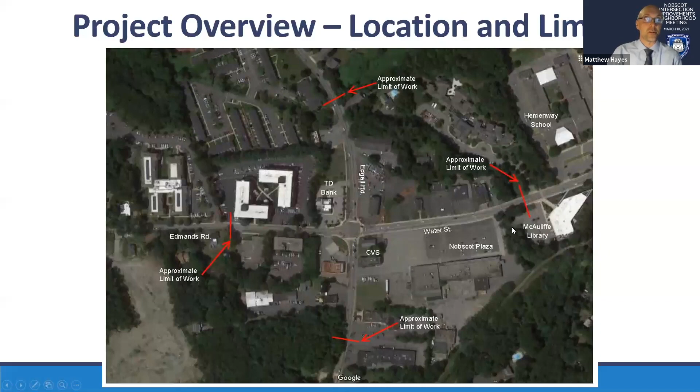You can see on the screen the limits of work for the project. We have Edgell Road running north-south, Edmands Road, and Water Street running east-west. The limit of work on Edmands Road is about 400 feet west of the intersection. South on Edgell, about 500 feet. North on Edgell Road, our limit of work is about 700 feet, and east on Water Street we're going about 800 feet, to approximately the entrance to the McAuliffe Library and past the fire station.

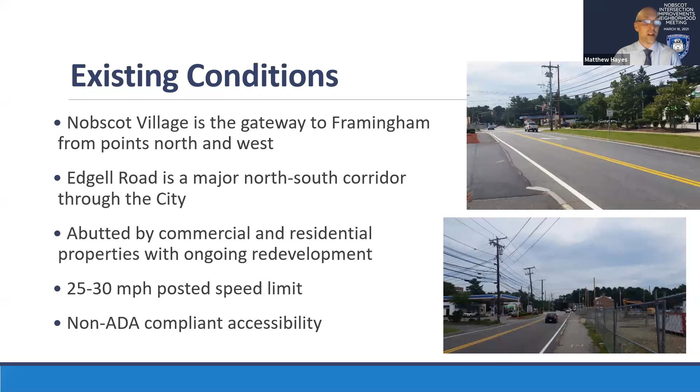Many of you are probably aware of the existing conditions at the intersection in Nobscot. The Nobscot Village is a gateway to Framingham from points north and west, with Edgell Road being a major north-south corridor through the city. The entire area is abutted by commercial and residential properties, with existing and ongoing development increasing the business and residential capacity of the area. The posted speed limits are 25 and 30 miles per hour, and many of the sidewalks and the intersection itself are currently not fully ADA compliant.

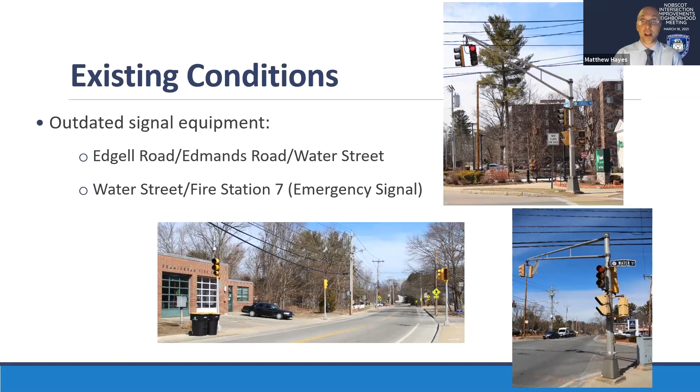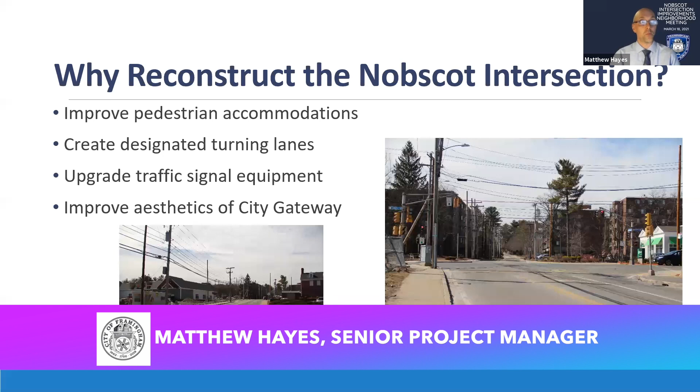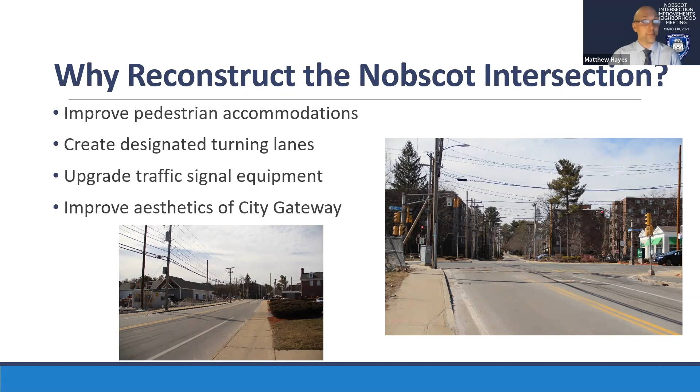The signal equipment at the intersection, as well as the emergency signal at the fire station, are outdated, and due to their location are prone to being impacted by traffic and turning vehicles, especially trucks. So why are we reconstructing now? We are looking to improve pedestrian accommodations, creating designated turning lanes or extending existing turning lanes, upgrading the traffic signal equipment and moving it to a better location away from possible damage, and improving the aesthetics of this city gateway.

Some project features include widening the travel lanes and turning lanes to 13-foot travel lanes and 10-foot turning lanes, with a turning lane on all four approaches to the intersection.

Pedestrian improvements include new cement concrete sidewalks throughout the project limits with a brick accent strip along the curbing, wheelchair ramps conforming to ADA standards, and new pedestrian signals and crosswalks. We'll also be installing ornamental traffic signals and street lighting.

The picture on the right is from the School Street and A Street intersection. You can see the ornamental mast arms, the street light posts, and the smaller traffic signal posts. They'll be fluted black, and they really add to the area, I think.

Also ongoing in the area are several commercial and residential developments, including the CVS right on the corner, which should be opening up probably sometime in April. The Village at Nobscot will be adjacent to the CVS. We don't have a schedule for when they'll break ground on that project, but we expect it no sooner than late summer. Also, the Gulf Station is scheduled to be redeveloped, and that project should get going early this year.

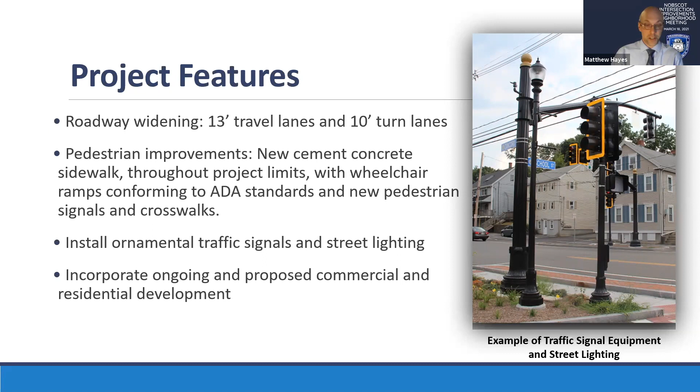Other project features will be accommodating bicyclists with sharrows, that's this pavement marking here. As you know, the corridor is very narrow and we could not fit in exclusive bike lanes, so this will give drivers awareness that they'll be sharing the road with bicycles when they're through here.

We'll be providing sufficient room for truck accommodations. As you know, some of the turns are exceedingly tight for passenger vehicles, let alone trucks, so those will be greatly improved.

The new MetroWest Regional Transportation Agency bus shelter will include a bench. There'll be a bus shelter placed in the vicinity of the McAuliffe Library on the east end of the project on Water Street.

We'll also be installing higher visibility crosswalks. These are the crosswalks you've seen around the city, the stamped imprint, the red and white, as you can see in the bottom right corner of this image.

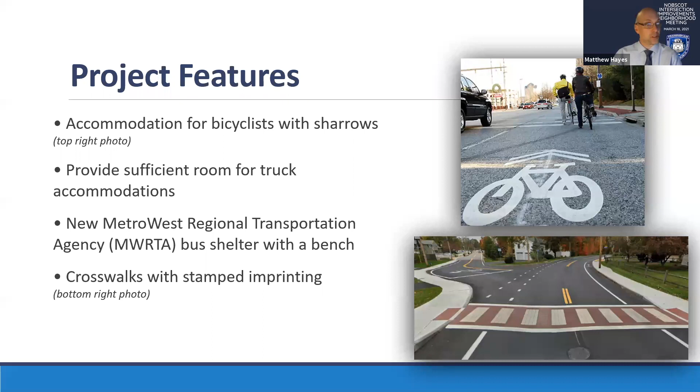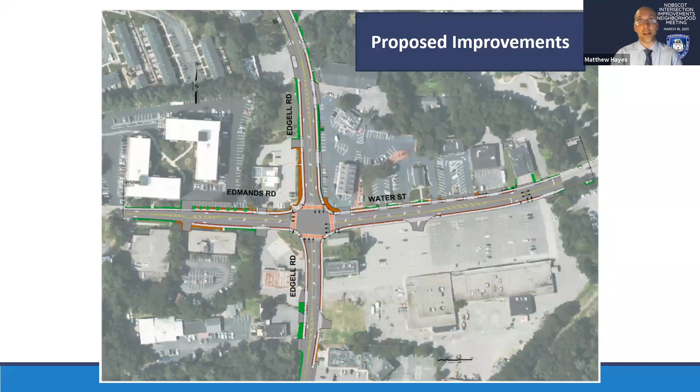Let me zoom into one area. Here we have Edmands Road. We'll be adding a left turn lane at this location, as well as a crosswalk where none exists currently across the Edmands Road approach.

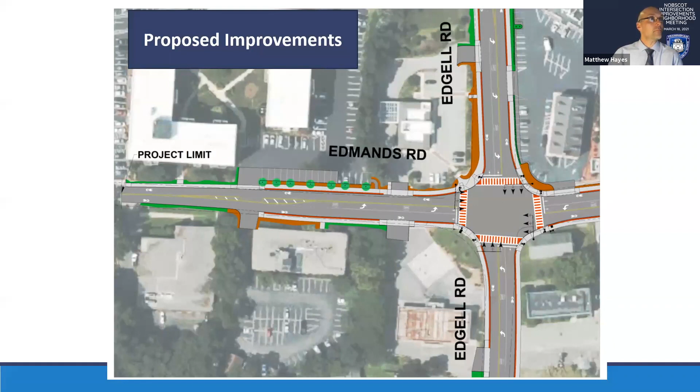Traffic and pedestrian impacts at this intersection. The construction duration is expected to take 2 years. It's a large project, and we expect to be complete with final paving early in the fall of 2022.

There'll be no work over the winter between. Construction this year will likely end in November. The construction moratorium will go until March, when we'll start up again in 2022.

The hours of construction for the project are Monday through Friday from 7 a.m. to 3:30 p.m. No night work is anticipated for the project, and no weekend work.

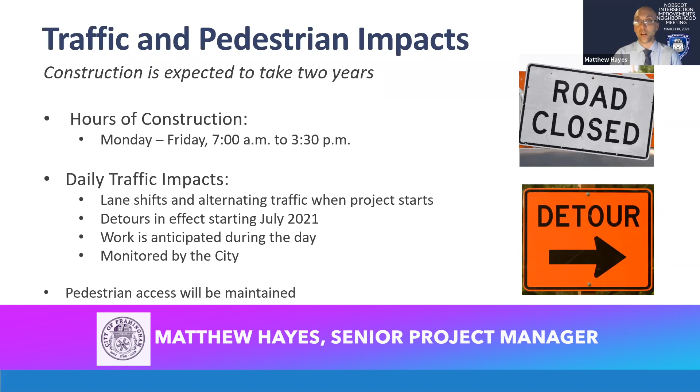Some of the daily traffic impacts that you'll begin to see starting next week will be lane shifts and alternating traffic, to facilitate some of the work along the curb line and drainage installations. There'll be police details on site to facilitate the traffic.

All the traffic in the area will be monitored by the city. We'll be monitoring traffic closely on a daily basis, especially when the detours are put into effect. We'll monitor those closely.

Pedestrian access will be maintained. There will be crossings where none may exist right now in order to facilitate pedestrians through the work zone. And police details, again, will be on site to facilitate traffic and pedestrian movements.

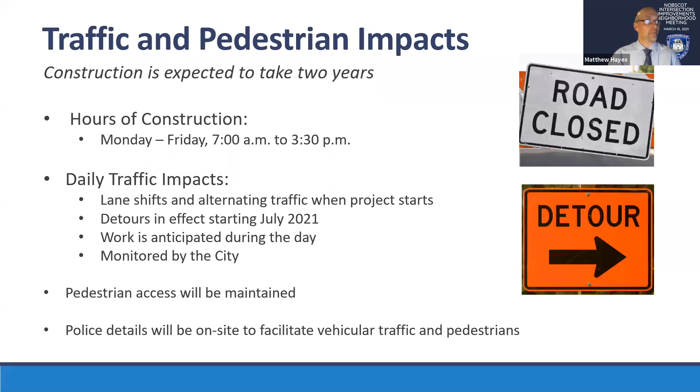Some additional ongoing projects in the area. There are 2 utility relocation projects. The main one that is required for this project is the relocation of the aerial telephone and communication lines.

All the utility poles have been installed, and Eversource Electric will be in the next month to begin moving all of their overhead wires. After that, communications telephone lines will be relocated as well.

Eversource Gas also has a project in the area, and we want to have that project completed before we final pave the area. So Eversource Gas will be installing a new main in Edmands Road and a portion of Edgell Road.

As I mentioned earlier, there's also a lot of private development going on in the area with the new CVS pharmacy, the gas station at 876 Edgell Road, and the village in Nobscot.

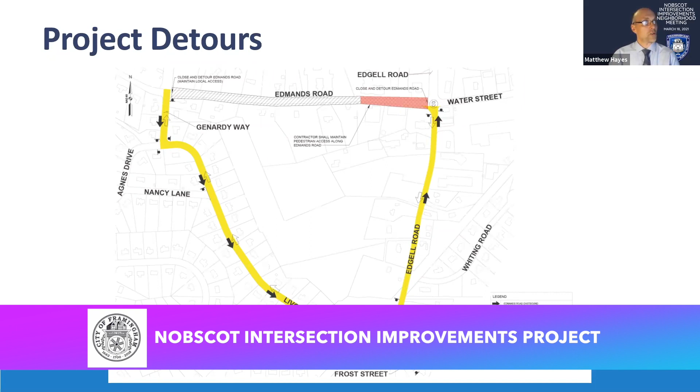The detours that I spoke about, there are 2. This detour is the larger detour, and we proposed this during certain times of construction on Edmands Road. We don't anticipate this detour going into effect until early to mid-July.

Edmands Road is a very narrow road, and maintaining even 1 lane of traffic on Edmands Road during this work would be very difficult, or would be impossible. So this detour brings traffic from Edmands Road down Genardy Way to Livoli Road to McAdams Road, back to Edgell, and up to the intersection. This is a 2-way detour, so it would also affect east and westbound traffic on Edmands Road.

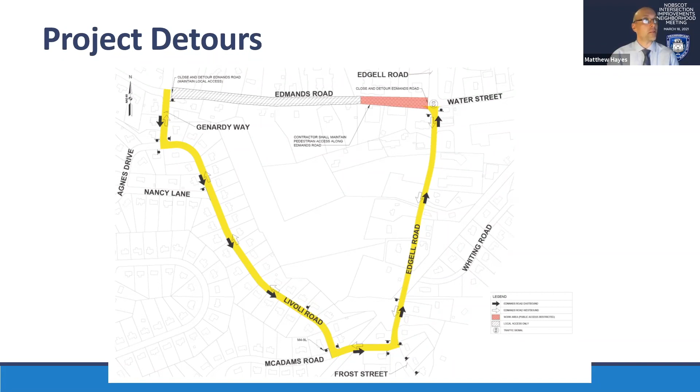Again, once this detour goes into effect, the city will monitor the traffic on these roads very closely. This is a residential area, we're aware of that. And we will be monitoring it very closely, and should changes be required, or further actions by the city, we will be ready to implement those.

The second detour is a shorter detour. It will go into effect during some work on Water Street. This is a one-way detour which will follow the internal road behind the new CVS. The new CVS will be up and running prior to this detour going into effect. As I said, it's a one-way detour from Edgell to Water.

Westbound traffic on Water Street would not be impacted by this. Eastbound traffic on Water Street would be detoured down Edgell Road through the CVS parking lot and back to Water Street eastbound.

We did work with the developer of this area and the owner to get an easement for this temporary detour, and they're working well with us to see this through.

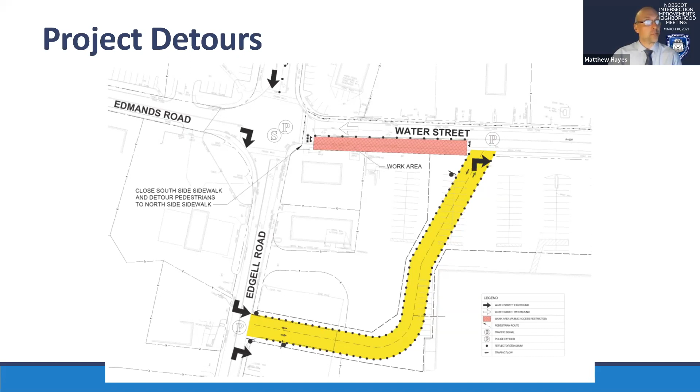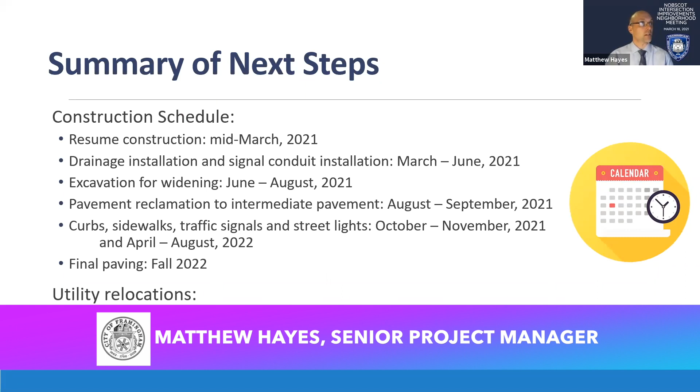So, summary of the next steps. Construction will be beginning Monday, mid-March. Our contractor, by the way, is Baltazar Contractors. Baltazar will be again to install drainage and signal conduits through the rest of the spring. They'll begin the widening operations through the summer.

Reclaiming operations, where they will grind up the existing road and pavement, shape it, and excavate where necessary, and then pave up to the pavement layer just below the final pavement layer. That'll be the intermediate pavement. That intermediate pavement layer will have temporary paving markings installed, and that pavement will bring us through the winter for final paving later in 2022.

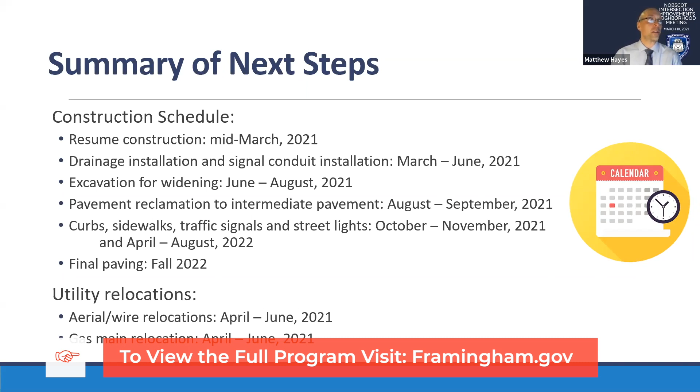Curbs, sidewalks, and traffic signals will begin to be installed in the fall of 2021, and that work will again proceed into 2022. Utility relocations by Eversource Electric and Eversource Gas are anticipated to start next month and run through early summer.

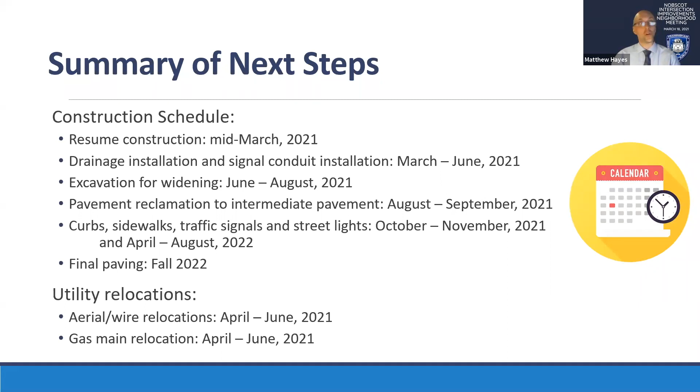We received a number of questions that we were able to review, add to the presentation, and answer. So I will go through these, hopefully answer some of your questions that you may have. And after these questions, we'll open it up.

A business owner asked: during construction, will my customers and vendors have easy access to the store? Access to local businesses will be maintained during construction. When construction occurs near access driveways, police details will be on site to assist with traffic.

The second question was regarding the driveway entrance into the gas station from Edmonds Road, and a concern of blocking traffic back into the intersection for traffic taking a left turn into the gas station. As part of the gas station redevelopment, the Edmonds Road entrance will be relocated further to the west, away from the intersection. During the gas station's project design and permitting process, no additional pavement markings were recommended at this location for do-not-block-the-box type markings.

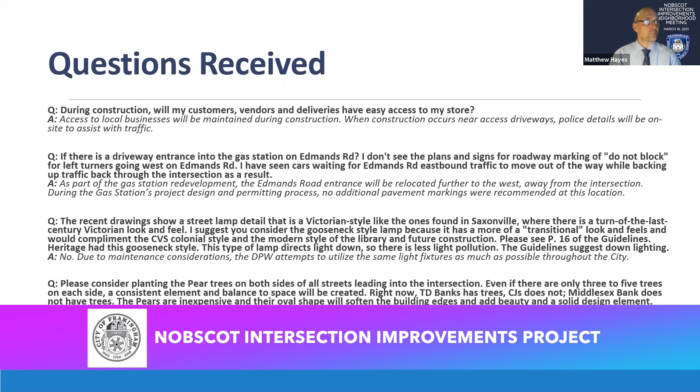The next question: the recent drawings show a street lamp detail, a Victorian style like the ones found in Saxonville, with a turn-of-the-century look and feel. The suggestion is to consider gooseneck style lamps because they have a more transitional look and feel.

We will be using the same street light posts. Due to maintenance considerations, the DPW attempts to utilize the same light fixtures as much as possible throughout the city, which gives us just one type of lamppost that would have to be replaced if it were accidentally knocked over.

Please consider planting pear trees on both sides of the streets leading into the intersection. We understand that landscaping would really add to the area, but there's limited right-of-way along these roads, which prevents these elements from being added within the city's right-of-way. However, the private developers are planting substantial landscaping at the new CVS and proposed at the new gas station at 876 Edgell Road.

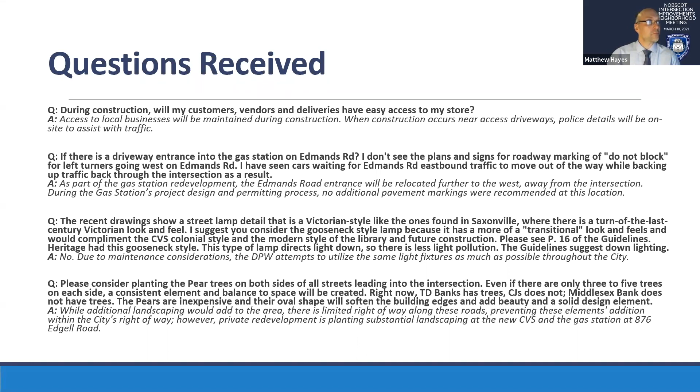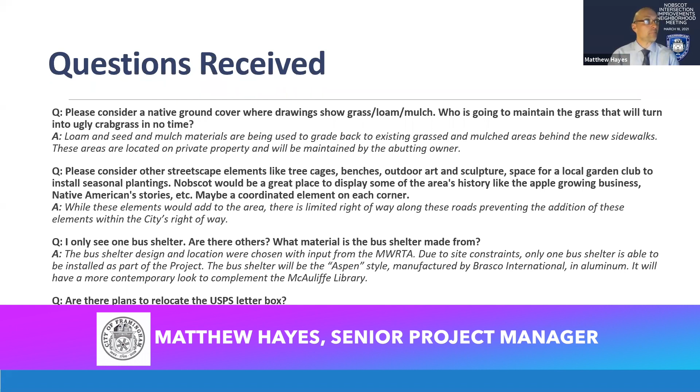Please consider native ground cover where drawings show grass, loam, or mulch, and who is going to maintain it. The loam, seed, and mulch materials are being used to grade back to the existing grassed and mulched areas behind the new sidewalks. These areas are located on private property and will be maintained by the abutting owner. The project has temporary easements to do work on those properties during construction, but once construction is finished, those easements will go away and maintenance will revert back to the owners.

Please consider other streetscape elements like tree cages, benches, outdoor art, sculptures, and space for a local garden club to install seasonal plantings. Nobscot would be a great place to display some of the area's history. While these elements would add to the area, there is limited right-of-way along these roads, preventing the addition of these elements within the city's right-of-way.

Next question: there's only one bus shelter. Are there others, and what material will it be made of? There is only one bus shelter; due to constraints, only one was able to fit within the project limits. It will be located near the McAuliffe Library, chosen with input from the MWRTA. The bus shelter will be an Aspen style, manufactured by Brasco International. We didn't have a chance to get that visual on the presentation tonight. It is aluminum, so it's low maintenance, and it will have a more contemporary look to complement the McAuliffe Library as opposed to the street lighting, making it a transitional area at the east end of Water Street.

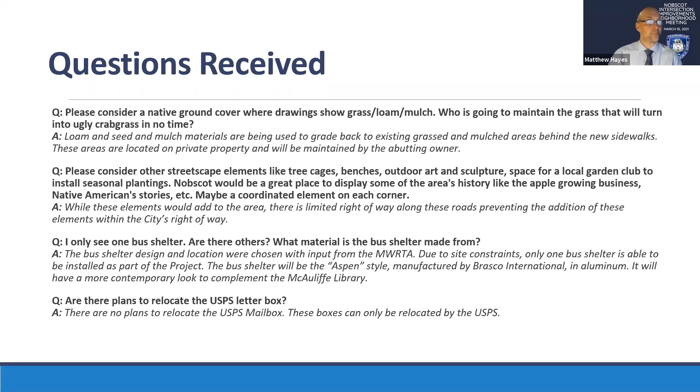Will drivers be able to take a right on red? Yes, I believe at every approach there will not be a no-turn-on-red sign, so right on red will be allowed.

Wasn't there an extra lane from Edgell turning northeast onto Water Street in the original plans? Due to right-of-way constraints and no major benefit to the operation of the intersection, the right turn lane was removed from that preliminary design, which I think was a few years old.

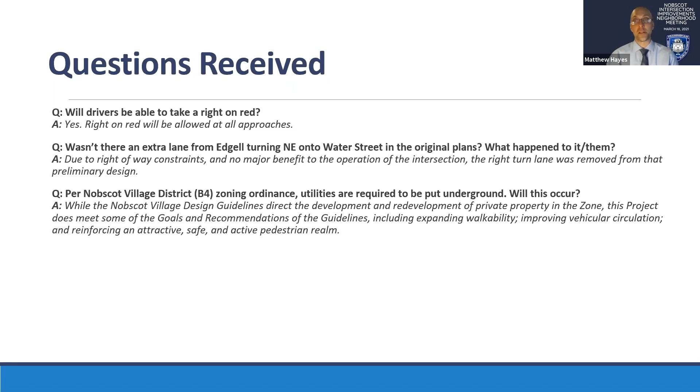Per Nobscot District B4 zoning ordinance, utilities are required to be put underground. Will this occur? While the Nobscot Village Design Guidelines direct the development and redevelopment of private property in the zone, this project does meet some of the goals and recommendations of the guidelines, including expanding walkability, improving vehicular circulation, and reinforcing an attractive, safe, and active pedestrian realm. The private developers are installing underground utilities, but there's no plan to place all of the overhead utilities within the right-of-way underground.